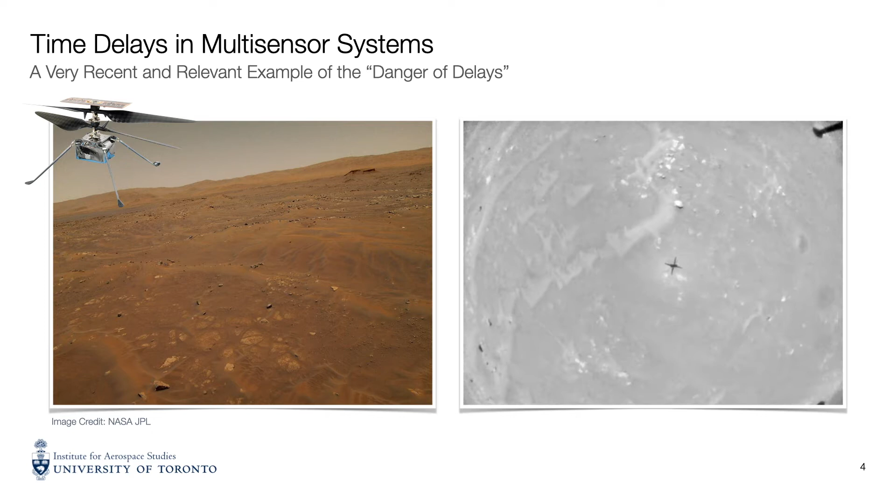So just a brief outline of the talk. I'm just going to go over the problem of temporal calibration, or what I'll also call time delay estimation. I've already talked about some motivating examples for why it's important, but I'll tell you about how we typically solve it. Then I will discuss recursive filtering specifically for temporal calibration and why we probably want to revisit the idea of recursive filtering in this context.

To support this argument about revisiting recursive filtering and that there may be some concerns in this area, I'm going to show you a very simple system model for an aided navigation application. And it's going to be, in fact, probably the simplest system model you can build. But that will allow us to explore what's happening carefully in temporal calibration specifically, and to see what the results are in a tractable way that is not confused with other variables that we may need to estimate as well. And so it provides a very clear-cut description of what issues arise in the context of temporal calibration with a filtering-based solution in particular.

I wanted to talk a little bit about the identifiability of time delays, which actually feeds directly into this problem of filtering. I will discuss some problems with filtering and then launch right into some alternative possibilities to explore. And when I discuss some of the issues with the filtering framework, I'll go over some simulation studies we've done to characterize this very simple system and show you what kinds of troubles might arise in practice with the system you're building.

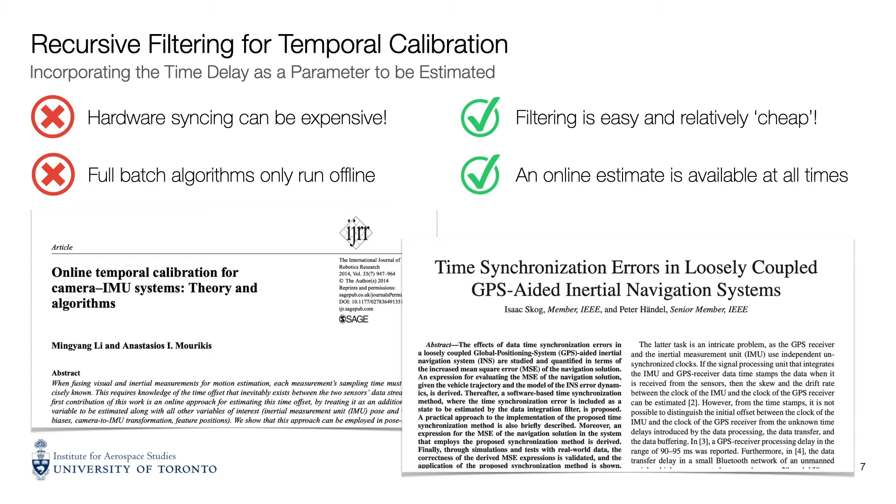And these are great. And of course, Kalman might pop in and say, "Hey, that's my filter." I don't actually know if Kalman ever said that, but regardless, it's a modification of his original filtering framework. And of course, Kalman filters are everywhere. And of course, we should also give some credit to Bucy for the continuous Kalman filter, and to many others who have built extended versions of the original filter and so on and so forth. But nonetheless, Kalman can be credited for some of the early work, and now these filters have been used all over the place, right? So again, bread and butter in robotics.

So we are highly motivated to make use of the Kalman filtering framework whenever we can, and certainly for delay estimation, it may make sense. Now, I'm going to claim later in this talk that there are some caveats and issues to be aware of that are perhaps not obvious when you apply a Kalman filter to this problem in general, as opposed to other problems that involve parameters that are not related to time specifically.

Okay, towards that end, I'm going to now introduce a very simple aided navigation system model. And when I say very simple, I mean really simple. And this is going to allow us to explore the problem of temporal calibration free of any unnecessary complexity. So here is the system. I'll call the system Sigma. And it's going to be, as I said, really, really straightforward.

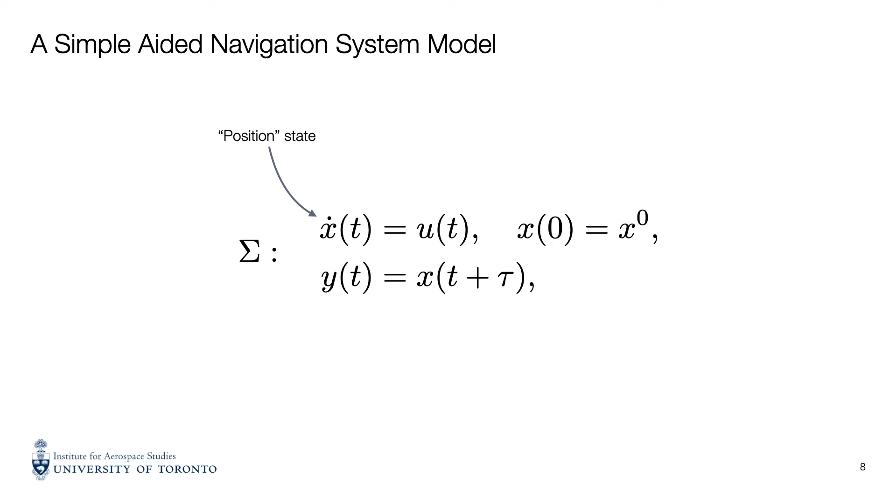I'm going to have just a single state that I care about. That's an underlying state of interest. And I'm going to call that the position. I'll label it as X, but we'll just call it position because we're dealing with, we'll say, an aided navigation system, so it makes sense to estimate position. So X will be our position, and the rate of change of the position variable is going to be a function of a single control input only.

And in a VINS context, or in this case, what we would call maybe a velocity-based system, because it's a first-order system, we're going to take this control input from what you can assume is some high-rate sensor that drives the process model forward. So this is the one-dimensional velocity-based analog of a VINS system. So we have one dimension of position only.

Okay. Then there'll be a single delay parameter that I'll call tau, and that's going to be constant for the analysis that follows, but it's going to be unknown. So we won't know it in advance. That's going to be a quantity we want to estimate as well. And we're going to see how we might go about doing that in just a moment.

There's going to be one measured system output, Y, and that is simply the time-shifted state. So it's a direct measurement of the output as a time-shifted version of the state. And this might make the system look linear, but you'll notice that the quantity in brackets is shifted. It's not a linear shift. It is in fact a nonlinear problem because of this time shift.

All right, and then possibly, if available, I might also give you some knowledge of the state at time t equals 0. But this is a bit tricky because I'm going to say that time t equals 0, which I'll represent here with a superscript 0, x at 0. With the superscript, that's the position at time 0. If I know the position at time 0, that doesn't mean that I knew the position at an earlier point in time or at a later point in time.

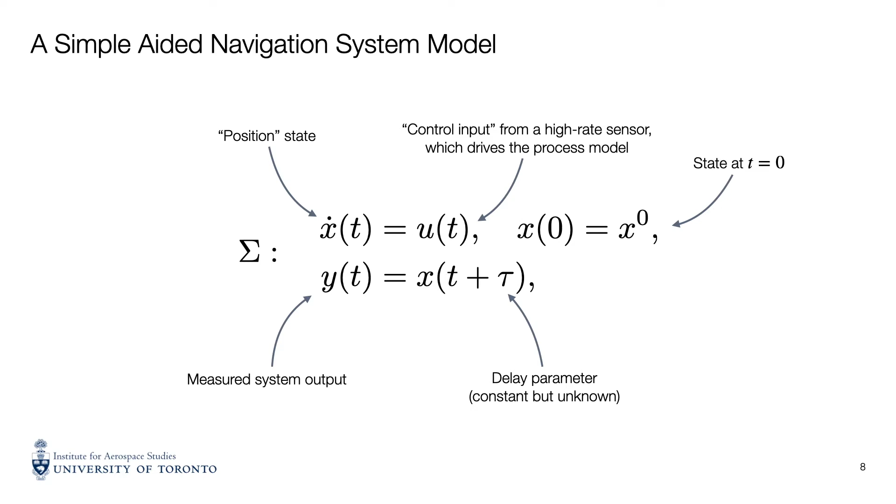Okay, so that's the system, and then I'm just going to put that in the larger context here of what we're going to do in our aided navigation system, just to show you how things are going to operate. It's a continuous discrete hybrid system. So the underlying system will be continuous, but we're going to get discrete sensor measurement updates. So we'll have a sensor that measures position, but that position is time shifted.

And what we're just showing you here is that you see the blue lines. There's a regular control input, right, which is our sensor that's driving the process model. So that's U of t sub k, because we're going to treat things as being discrete, but then propagate forward in continuous time. This is exactly what's done in VINs usually.

And then you can see here that we're actually feeding everything into a version of the extended Kalman filter, computing the updated state, delay, and covariance estimates using the subscript k+1 for the next time, and capital letter P in bold for the state covariance matrix. And the state in this case will just include the position x and also the parameter tau.

And so here along this line, you can see that we've just done this for illustration purposes. We've got an estimate tau sub 1 with a hat on it that says that this is the first estimate of our delay parameter, which could be a positive quantity, but in actual reality, for the plot here, the value of tau is negative. It's less than 0. So the measurements here are delayed relative to the state.

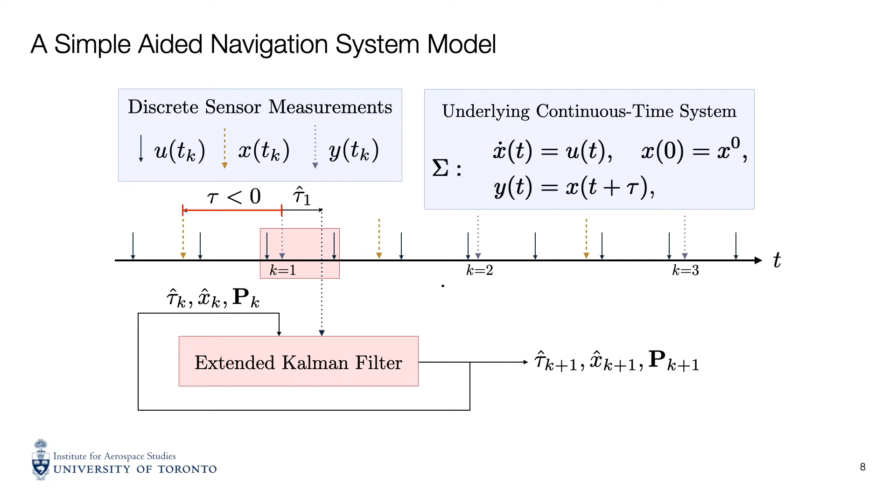Okay, so now I'm going to bring up the first issue that is perhaps not immediately apparent and hasn't been reviewed extensively in literature. And that is, I'm going to try and show you a very simple argument that the delay parameter in any system requires a finite time for identification. And this is certainly true for the simple system, and I won't argue too much here that it applies to more complicated systems, but indeed, in practice, if you write this material down, you can see that it does in fact apply.

And so this just means that usually we consider quantities of interest in the filtering framework to be instantaneously identifiable. And my proposal on this slide is that that is not in fact true for time delays. And so I will show you that in the following way. I'm going to build two instances of that simple system that I showed you, sigma, on one of the previous slides. And I'm going to actually simply time shift the inputs, the U of t's, to two of these systems.

So my goal here is to construct two systems that produce the identical outputs over some range of time, say 0 to 1 second in this case. So identical outputs, but for which the actual time delay parameter is different. So again, two systems, two different time delays, but identically measured outputs over a 1 second interval. And if I can in fact show you this, then I would argue that over that 1 second interval, you cannot distinguish these two systems from each other. And yet the tau parameters are different.

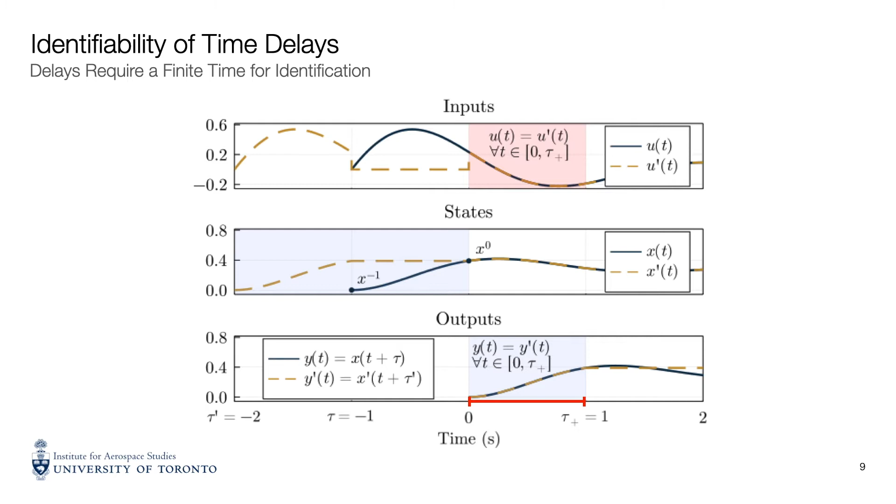Okay, so getting a bit more into the weeds, and here I'm going to present some equations that will be very familiar to you if you're familiar with the Kalman filter. If you're not, please bear with me. I'll try and walk you through some of the details here about why that identifiability concern might rear its head when we're trying to build a filter that works to estimate the time delay. So as I said, usually when you're dealing with filters and you're building a filtering system, you depend on the underlying system to be both observable and or identifiable.

...for states and parameters respectively. And here I've shown you that, in fact, the time delay is not identifiable, and that actually also means that the state here is not observable in a period less than the true delay. Now, that doesn't mean that it's not bounded. It is bounded. That is certainly true when you have bounded controls. However, it is not uniquely identifiable, or it being the state or the time delay is not observable or identifiable within the delay period.

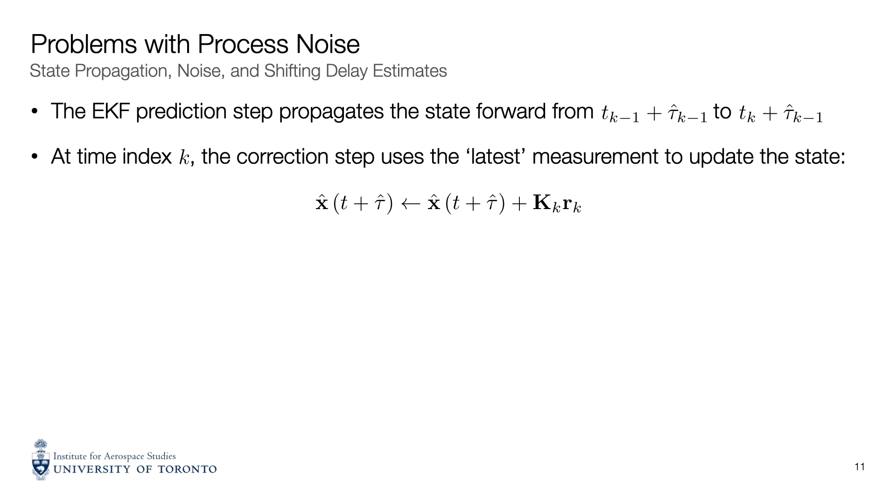And when I do that, right, when I shift the value of tau, I'm never going to shift it in a way that is perfect, right? By definition, given some noise, there's like zero probability exactly that I will get the delay perfectly correct. And so since the delay update is never exactly correct, when I shift my value of tau from tau hat k minus 1 to tau hat k, when I do that update, then on the next cycle of the filter, I have to propagate the system forward.

Normally, I would do that by adding process noise to express my ignorance of the underlying system dynamics and other noises that might be involved, etc. But the problem in this case is that I'm going to attempt to tune my process noise, but the interval over which the process noise is added will also vary, and it's going to vary on a per cycle basis.

And so if I have a constant amount of process noise that I am adding, the interval over which I add it will vary. And it's quite possible that this integration period may bounce. It may be a little bit too long, then a little bit too short, then a little bit too long, and so on and so forth. And the duration of the integration period depends entirely on the measurement updates and entirely on the random noise that is encountered when the filter is operating.

And so this bouncing around is generally a very bad thing because it makes tuning of the process noise difficult or impossible. I don't want to crank the process noise up too much, assuming that the intervals will always be too short, because then I'm effectively overweighting my measurements. And likewise, I don't want to make the process noise far too small, assuming that the measurement intervals will be too long, and thereby jeopardize filter consistency by ignoring measurement updates effectively. So this process of bouncing around, no pun intended, the process of the process noise

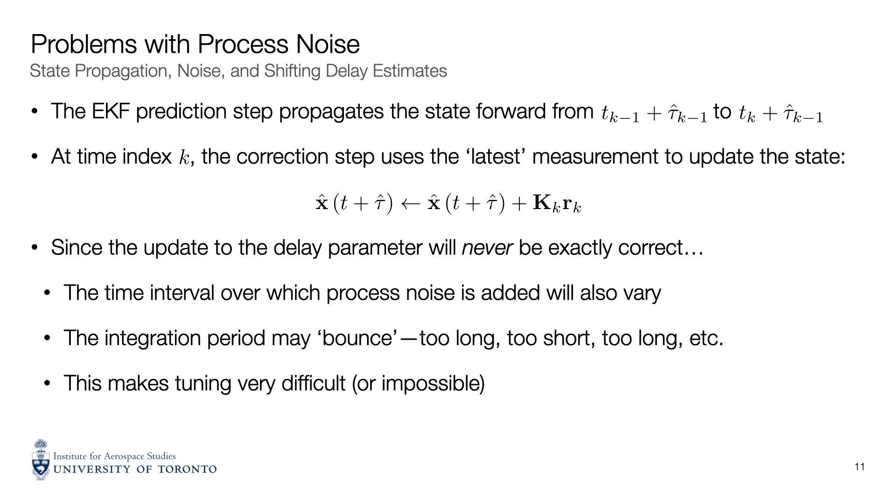is difficult to tune, and it hints at something that's fundamentally wrong, I think, with this type of filtering-based approach. We're actually jiggling a value in time that is related to time, and so this is quite different from what we do in the normal EKF, and indeed it can lead to some pretty nasty problems. And so we should think about this as a potential red flag, right? So the fact that we are looking at trying to tune a process noise term that cannot be both too large and too small at the same time, again, sorry, referring to time twice, is something that should make us a little bit nervous about how these systems operate in this filtering context.

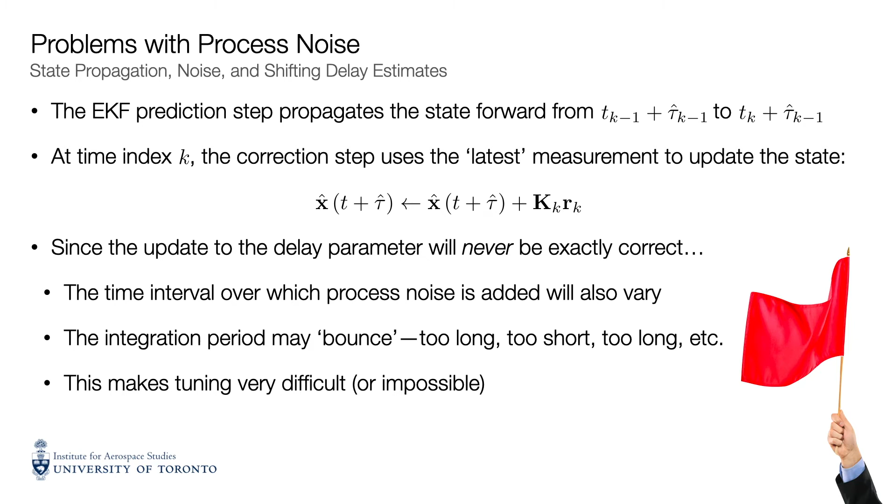Okay, and so there's a logical conclusion of this issue with process noise, and we can talk about delay updates and causal processes. So again, just reiterating what I said in the previous slide, the EKF prediction step propagates the state forward in time, and then at time index k at a discrete point, it gets the latest measurement update. So we saw those equations before. And as I noted, there's an induced shift in the delay parameter tau, which varies the time over which we would integrate process noise forward.

But also, if you look at this quantity that I'll call delta tau, which is simply the difference between the most recent value of the delay and the value of the delay on the last update, there's actually nothing in this entire filtering framework that prevents this from being a fairly large positive quantity. And what does a large positive quantity mean? Well, it means that the filter is actually apt to, in certain cases, granted subject to a rare probabilistic occurrence, jump forward in time sufficiently far such that a measurement that has come in most recently can actually already be in the past at the time it is incorporated into the filter.

And so this is a very strange thing. It's difficult to describe, but you actually do see it for this very, very simplified system that we have discussed, and it is unlikely to occur as frequently in an actual VIN system, simply because of the second order nature of that system. But nonetheless, it can occur. There is nothing in the filtering framework that prevents this from occurring.

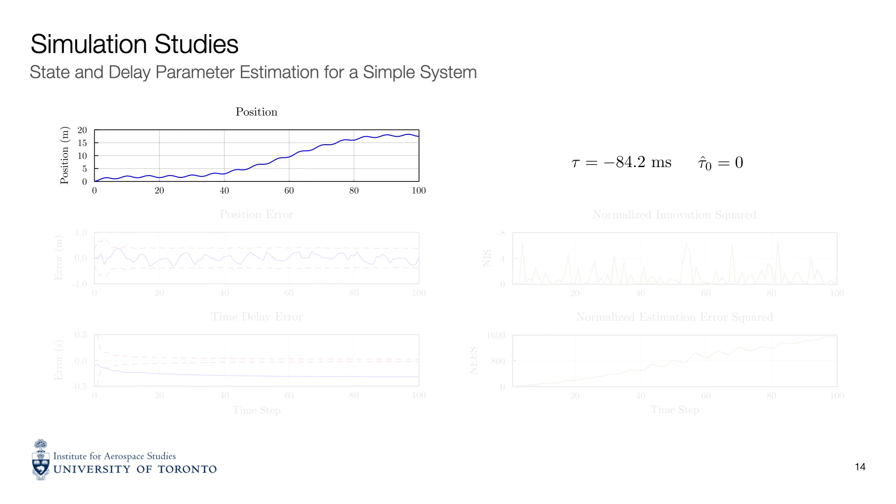Again, we've initialized the system with a delay value of 0, and in this case, we're using what I would call a slightly more aggressive control input, which is effectively a velocity control. You can think of it that way. Again, the control is just a sum of simple sinusoids, and as such, the position output is just a sum of simple sinusoids. But here you see we have a low frequency sinusoid with a higher frequency ripple sinusoid on top. So the actual accelerations, if you will, in this system are larger, and so it's a bit more aggressive if you were thinking of this as say an aerial platform.

So plotting exactly what we plotted before, we can see in this case with a larger time delay and the slightly more aggressive trajectory, what we end up with is a case where with the same process noise and measurement noise parameters that we used previously, so without altering those tuning parameters, we end up with the plots you see here. So in this case, the position error comes much closer to the 3 sigma bounds, although it does not cross them. That makes me a little more nervous.

And then you can see again behavior for the time delay that is very common to many of the simulations we've run, where here the divergence is even more severe. So apparent divergence, that is divergence to an incorrect quantity, that occurs very quickly, right? You can see that the delay estimate becomes rapidly inconsistent, potentially due to that issue with identifiability.

And once the time delay estimate is outside of the 3 sigma bounds, it again asymptotes, but to a value that is very far away from the true value. In fact, it's almost 400 milliseconds here, and it's actually in the wrong direction as well, has the wrong sign. So again, looking at the normalized innovation squared plot, we see that there are spikes here that are now reaching up to about 7 when the value should be 1.

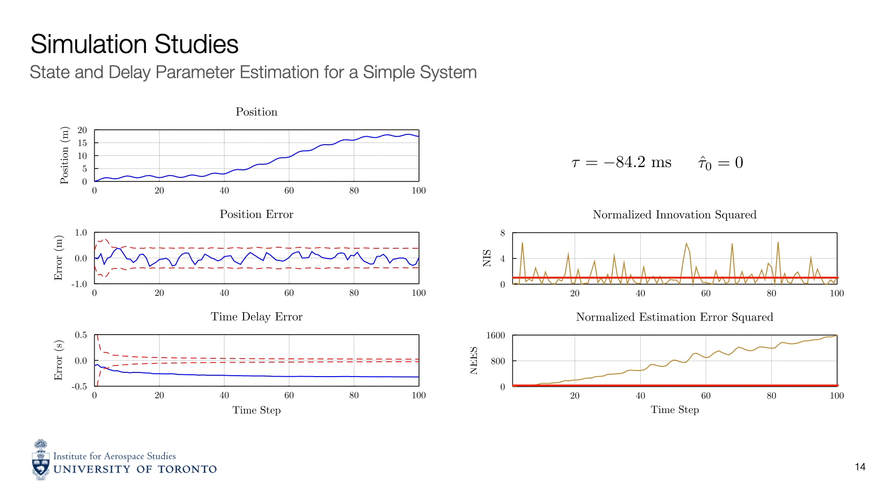And my argument in this talk is really that we should carefully consider whether this is the right way to solve this problem. It may work in certain cases, it may work for certain systems, but the theoretical underpinnings are very shaky, I think. Okay, so to end the talk, I think I'm a little bit over time, so I'll end up here for today with an argument that maybe we should reconsider the filtering-based approach to this problem.

So the things we've discovered in this talk are that the time delay is not instantaneously identifiable, and I gave a bit of a hand-wavy proof of that, but I'll point you to a better source for the proof on the next slide. So because the time delay is not instantaneously identifiable, and we usually make the assumption that these types of quantities are identifiable or observable instantaneously, we need to look at that very carefully.

We should consider the fact that the measurement Jacobian depends on the applied control, and that we may not know the applied control at the time that a measurement arrives because of the time shift, and that the control may be quite different, and so instead of considering the standard approach to tuning measurement noise, for example, we should actually consider the fact that the system can be anywhere within its own reachable set, which is very easy to define for the simplified system I showed you here, but much more difficult to define for more complicated systems.

The result of this issue with the measurement Jacobian is that the innovation variance may be too large or too small. And I've put small in italics here because generally the case we care about more, which leads to inconsistency of the filter and the need to restart or just throw the whole thing away, is the case where uncertainties become too small. Right? So we're concerned about cases where things are too small. We're overweighting our updates effectively.

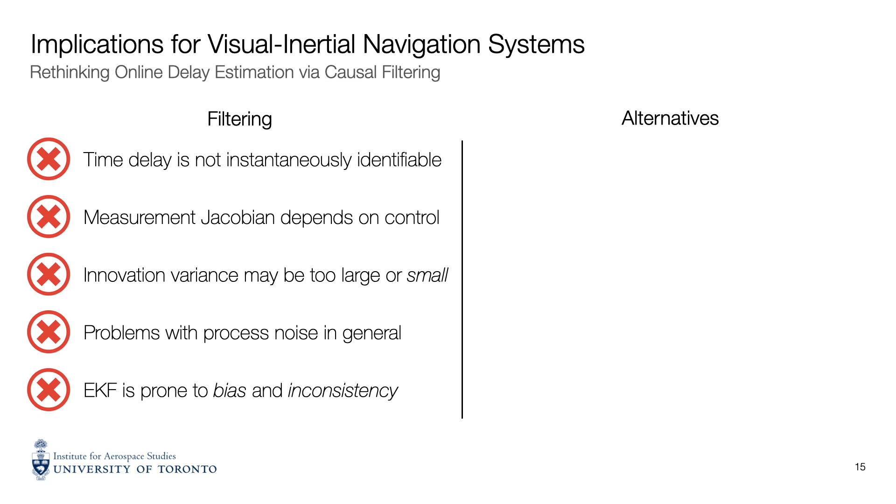And so, what can we think of as some alternatives to this? Well, I think there's some interesting work still to be done in this area, and certainly I may have let you down by not giving you an answer to how to solve this problem, but there's certainly interesting research that could be done. So we could use a sliding window method that covers the delay interval, and that may allow us to do this type of estimation in a more solid manner. But then again, at the expense of having a delay estimate that is not quote unquote online, where there's a lag with the delay estimate.

There's been some work on observers for time delay systems. That may lead to some interesting alternatives that maybe have provable convergence guarantees. It depends. One possibility that's been suggested to me is to consider something like an H infinity type filtering framework, where it's a game theoretic worst case analysis, which could allow the time delay to be more robustly incorporated into this type of a filtering setup.

And then there are a number of other approaches that could be explored: set-based techniques, interval analysis, and so on and so forth. So I would love to encourage the community to think about some of these possibilities.

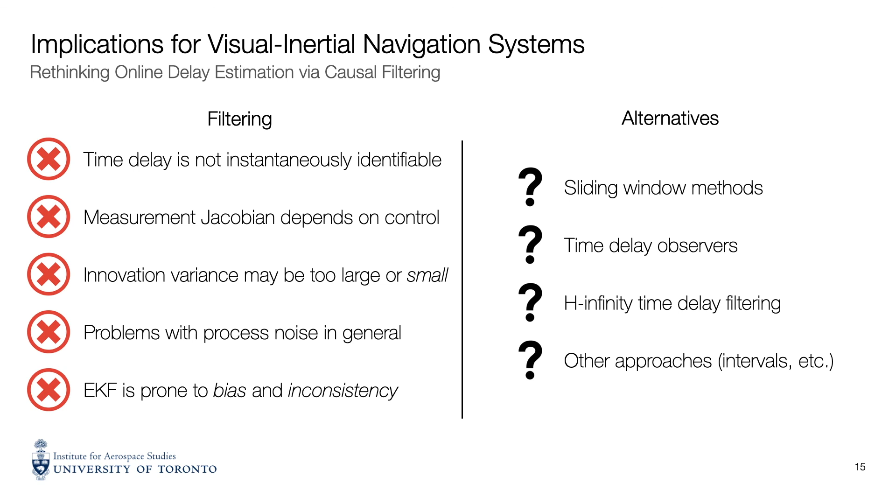So just some conclusions to tie up at the very end here. In this talk, myself and the co-authors of the paper I'm about to show you attempted to lay out some fundamental concerns with the filtering-based method for time delay estimation or temporal calibration of VINs and of other multi-sensor systems where delays are present. And I would argue that this is perhaps not all that surprising, since, as I mentioned earlier, time is usually considered to be the independent variable in all of these filtering frameworks.

So if you think about, again, X and Y axes, all the measurement stuff occurs on the Y-axis, and in general, nothing is meant to affect the X-axis. But when I introduce this tau parameter, that is a shift that occurs in X, not in Y, along the axis that is normally considered to be independent. So if we were looking at this in a least squares framework, what you would probably consider is something called total least squares, right? Or an errors-in-variables model, and that is not generally incorporated into the filtering setup.

So I think there are some interesting alternatives that could be explored, including some types of observers that have certain convergence guarantees. That's a possibility.